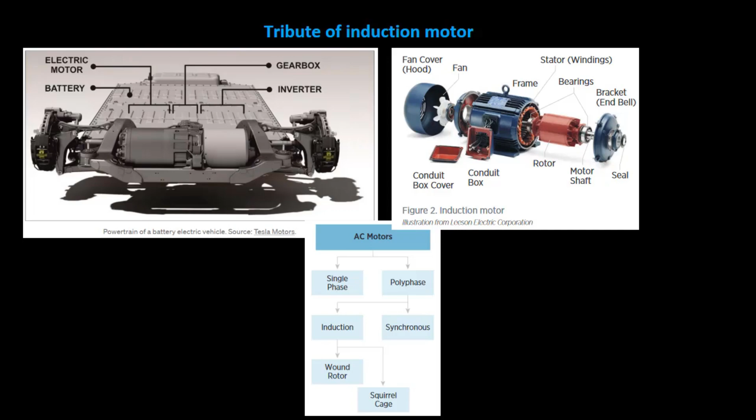For the last decade, electronically controlled motor drives have become vital to automated machinery, from traction and propulsion to servo systems, robotics, and automated machine tools.

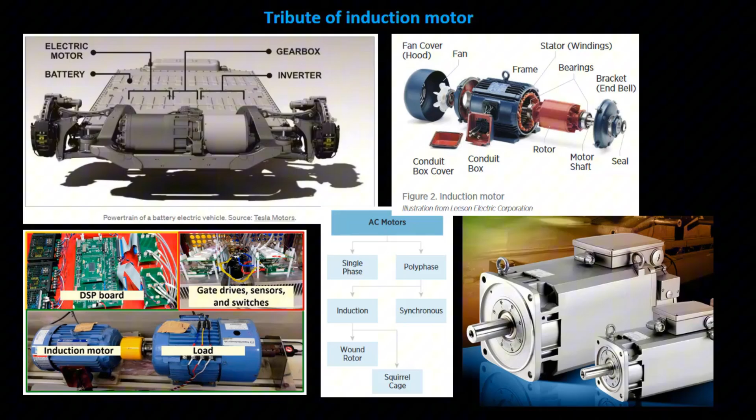Developments in digital and power electronics have provided high degrees of control at affordable prices, and with low inertia and wide availability. The AC induction motor is the workhorse of the industrial motor drive industry.

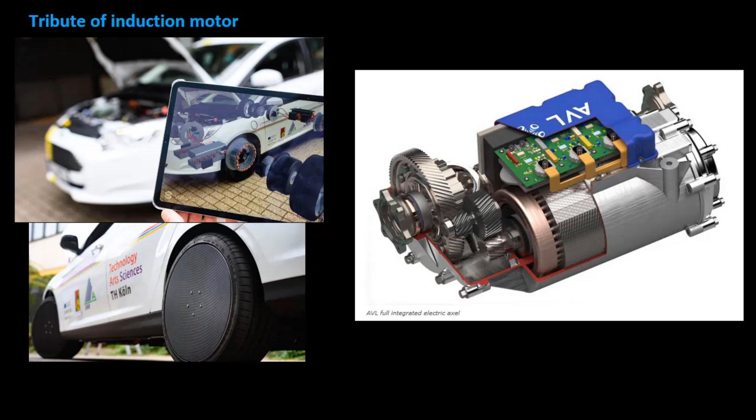But even with simple control needs, further improvements in induction motor performance and efficiency are possible using sophisticated digital control algorithms to handle variations in parameters such as torque and load.

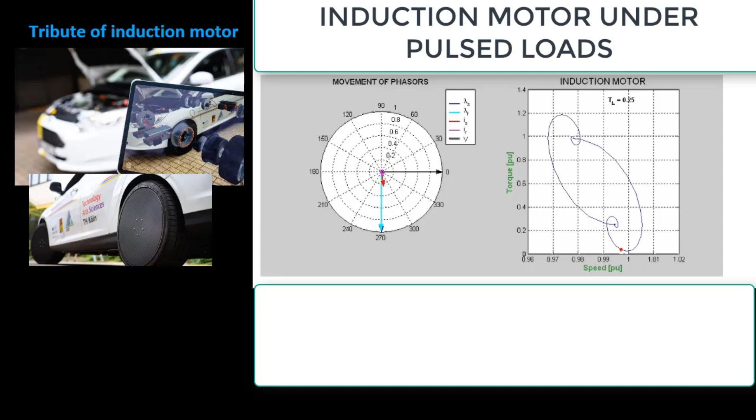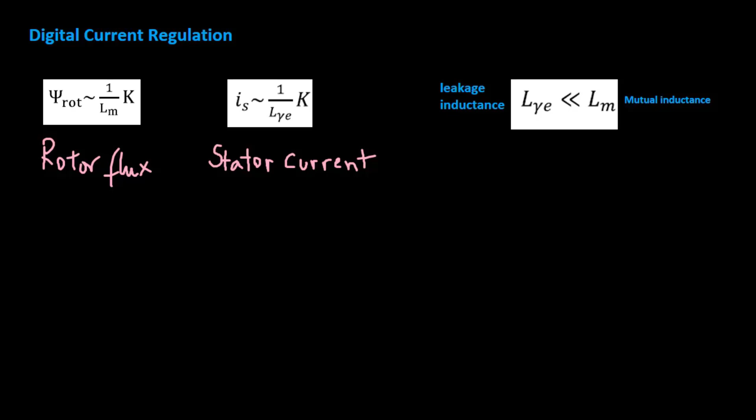It is known that torque can be controlled via flux or currents. In vector control, in our case indirect vector control, the goal we want to achieve is decoupled torque and flux control, like DC machine control.

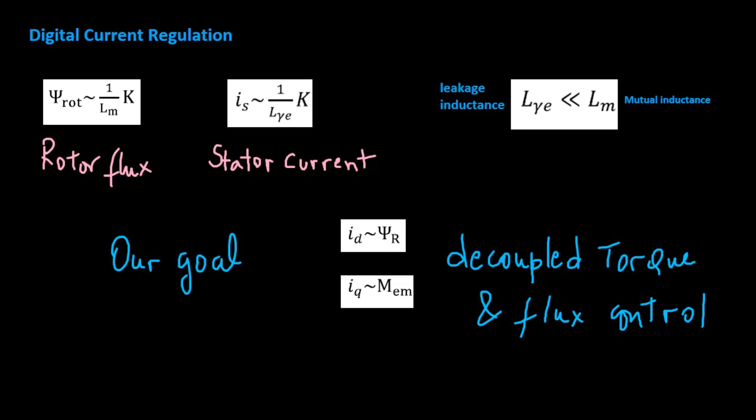We observe one-phase winding of the stator and model it with this first-order transfer function, and we use a classical PI type for regulation.

If the current regulation were done in the stationary coordinate system, the current reference would not be of the constant type, but a sinusoid at some frequency, which would result in a signal delay. The first idea is to solve this problem by increasing the proportional action of the regulator, which would result in an increase in the bandwidth of the system.

In this case, even if we had an ideal situation in terms of filter noise and disturbance, the question remains how much the proportional effect can be increased, bearing in mind that no matter how accurate the model, there are always things we have neglected or overlooked.

With AC machines at relatively high torques, a very small phase error can cause major problems, in the sense that the control will no longer be decoupled, that we can no longer independently control torque and flux.

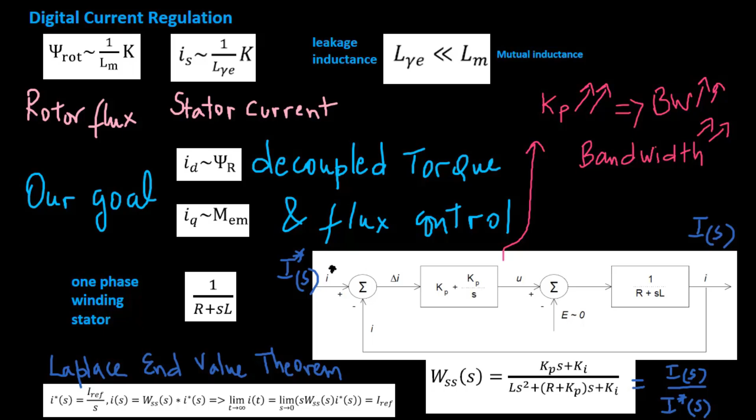For this reason, it is necessary to perform current regulation in an imaginary DQ coordinate system, where our references would really be constants, and we would not have problems with the phase, because the signals ID and IQ would be constant even in the steady state.

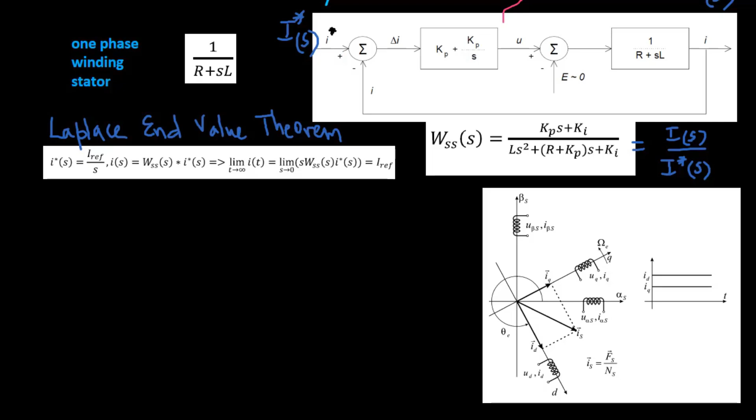Based on the internal model principle using the classic PI controller, we come to the problem of unwanted coupling, where the control variable UD acts not only on ID but also on IQ. For more details on this problem, see our last videos.

This problem of axial decoupling can be solved by introducing this cross-integral action in the regulator, or this decoupling technique.

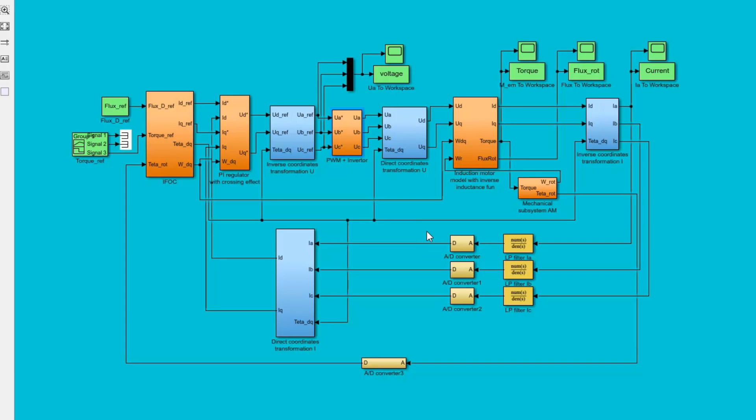Having explained what shape our controller should be, we now need to determine the optimal parameters of the digital controller that we will implement in the computer. For that, we need models of the control object, the three-phase inverter and the measuring system in a discrete domain.

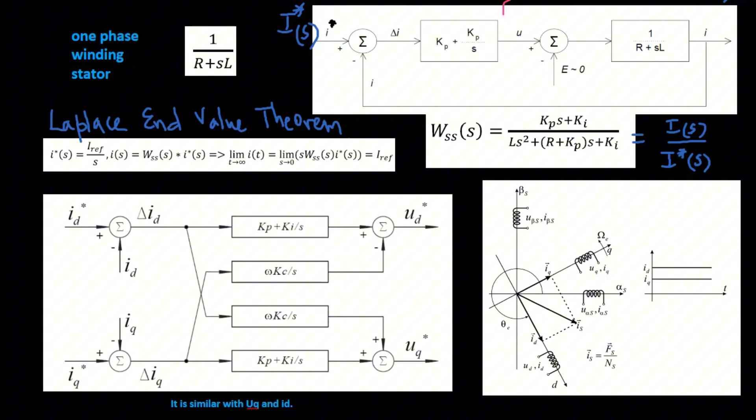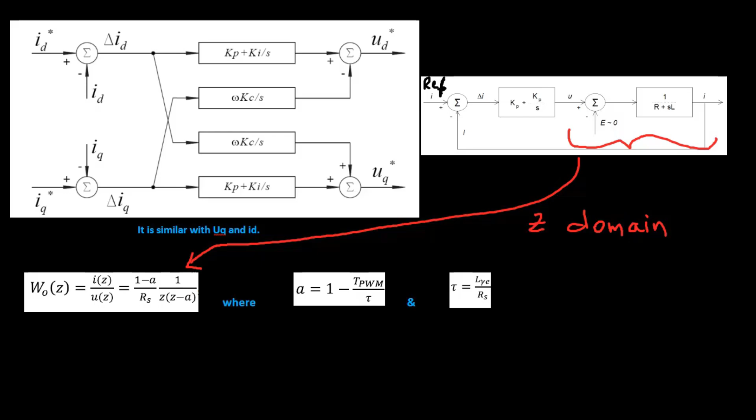In the real situation, the voltage calculated as the mean value over the interval of one sampling period is applied only in the next period. This will be the discrete transfer function of the control object.

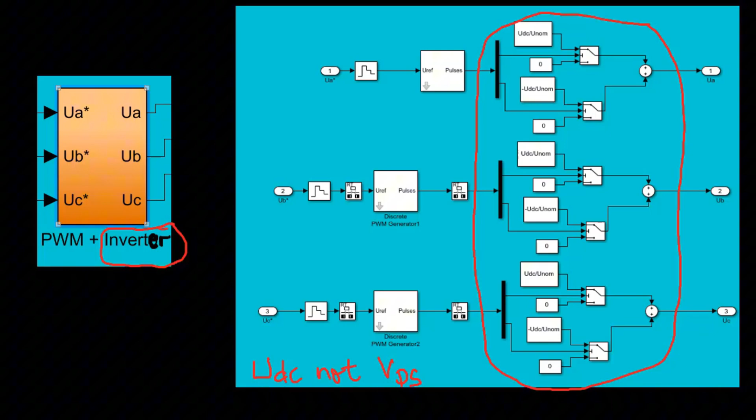The inverter is represented by a simple DC power amplification Udc, which amplifies the pulses of the PWM signal, which in relative units amounts to this.

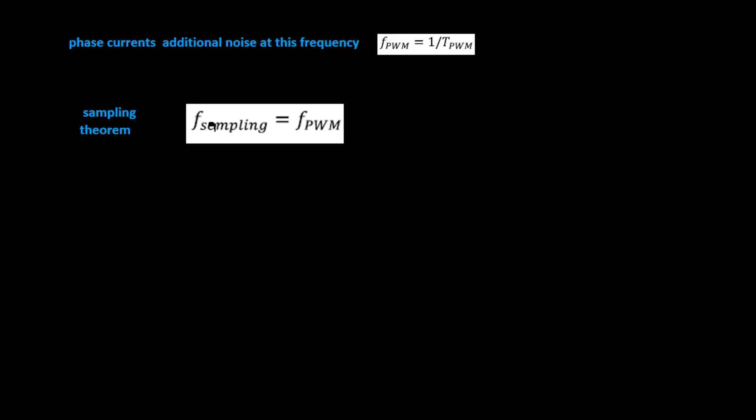The problem that occurs when measuring the stator components of the current is the following. Phase currents that are otherwise sinusoidal have additional noise at this frequency. It is clear that the sampling theorem will not be satisfied. For this reason, it is necessary to filter everything with an analog filter.

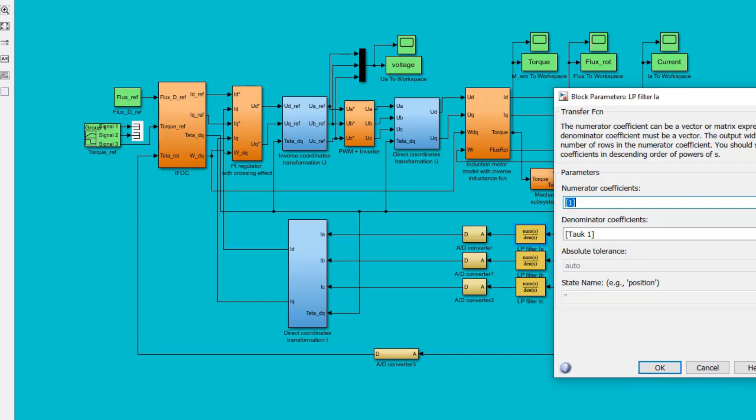As we cannot achieve such an ideal filter, a compromise solution is achieved through a combination of a real analog filter and oversampling, meaning the signal from the current sensor is sampled more often than the rest of the system.

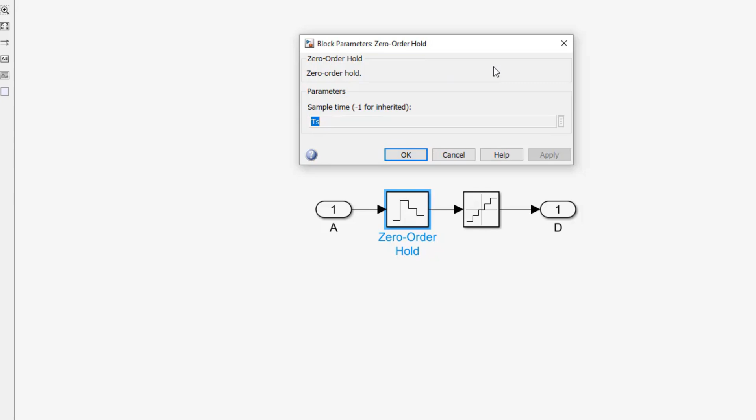In this way, by fulfilling the modified Shannon theorem, meaning that the amplitudes of the signals at frequencies greater than half the sampling frequency are less than the value carried by the least significant bit of that ADC converter, we would obtain acceptable results.

With the approximation that the current signal is a pure sinusoid and that it changes linearly during one control period, this will be the transfer function of the measuring system. This is the assumed form of the digital controller transfer function in the form of a classic PI controller.

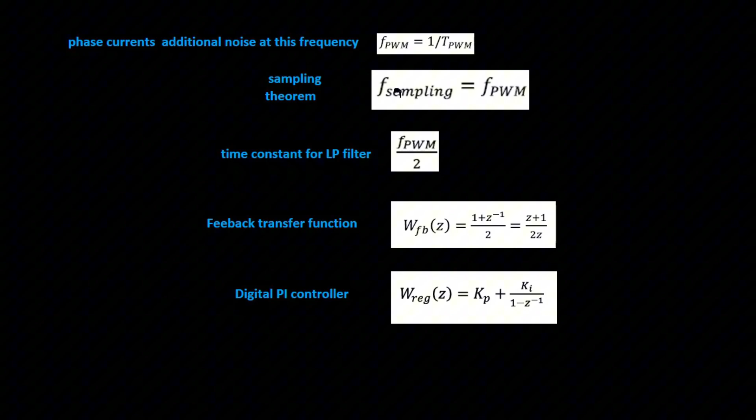In order to find the optimal values for the controller parameters Kp and Ki, it is necessary to observe the characteristic polynomial, which is the denominator of the transfer function of the whole system. We obtain this after calculating the characteristic polynomial.

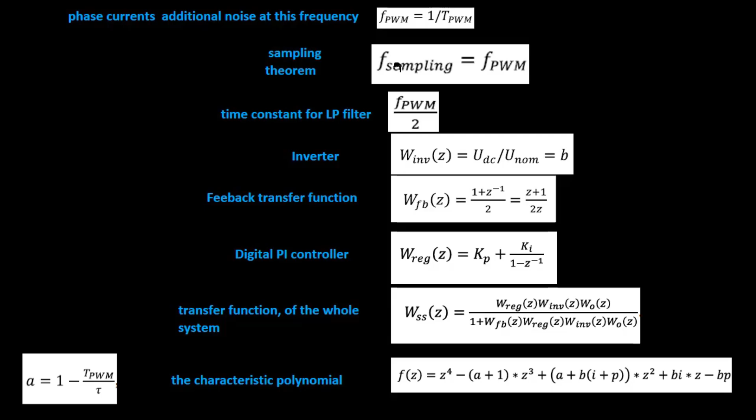The algorithm for determining the optimal parameters of the controller is executed by calling certain M-files.

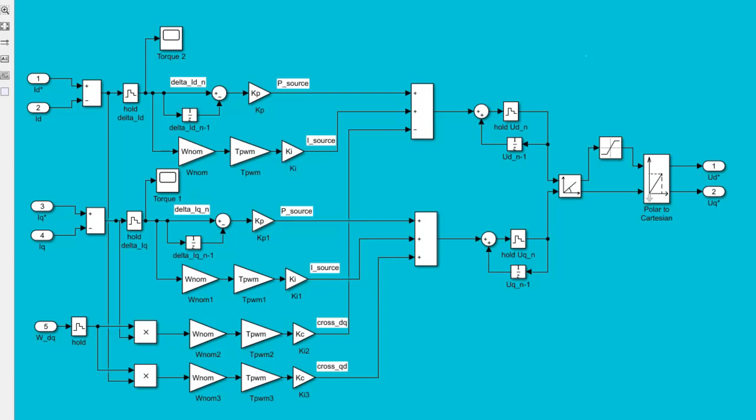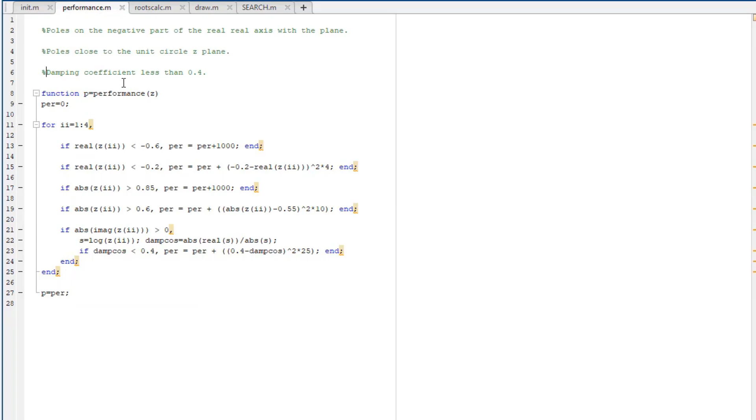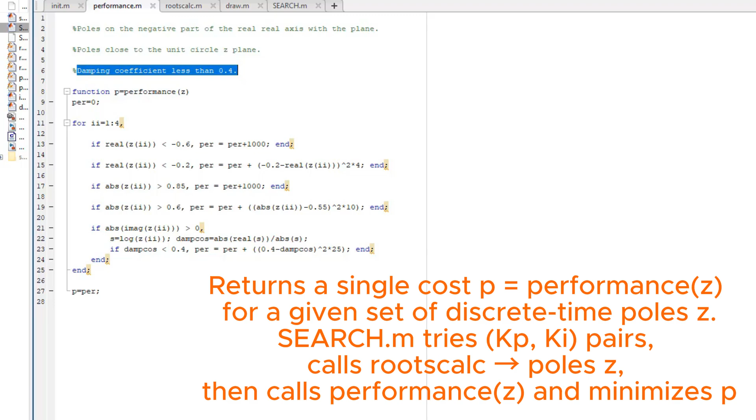These functions evaluate the parameters by searching for the best solution in the desired parameter space. The criterion by which the optimality of the parameters is determined penalizes the following phenomena: poles on the negative part of the real axis of the z-plane, poles close to the unit circle of the z-plane, and a damping coefficient less than 0.4.

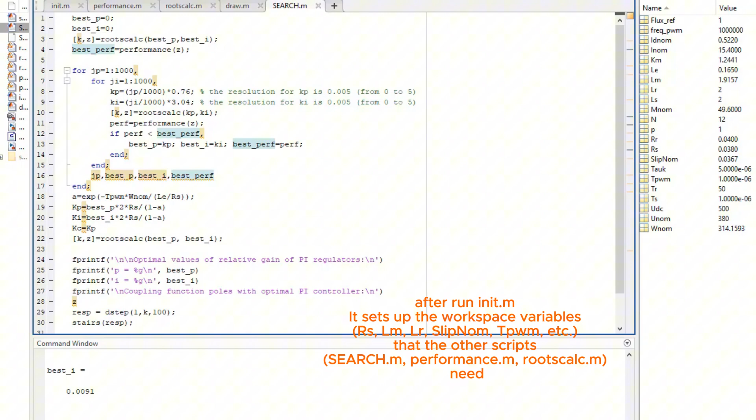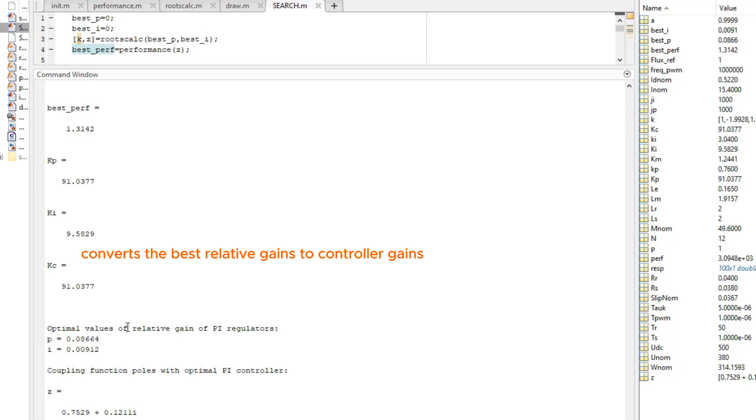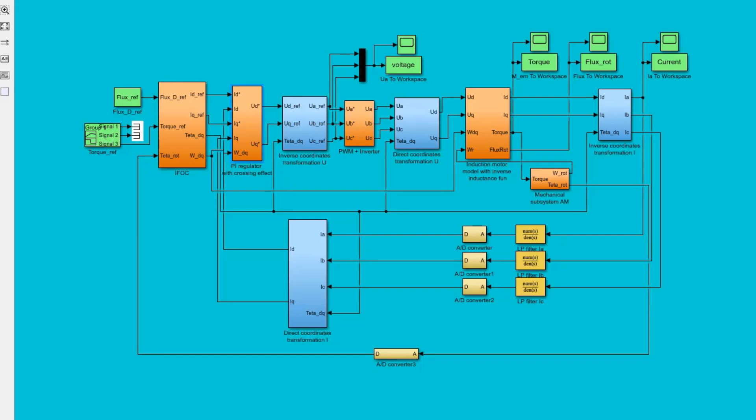By modifying the criteria, we would get different optimal values for the parameters Kp, Ki, Kc of our regulator. In the next video, we will take a closer look at this model and explain all subsystems.